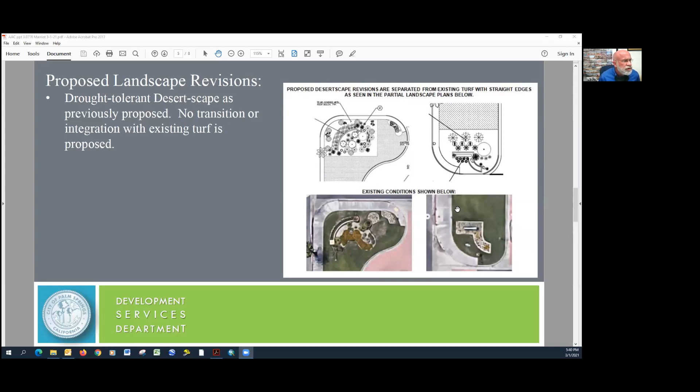On the landscape revisions, one thing the AAC noted was the abrupt edge created by the integration of drought-tolerant landscaping in a couple of areas on the site. These are just portions of the site for illustration purposes—these aerial photos show the turf they have now, and then the same areas with the proposed desert scape. The AAC's comments were that rather than having this hard line or border board, it should be better blended in a more naturalized way. That has not been integrated, and the plant scheme has not been changed, so we're still recommending those items be adjusted accordingly.

The lighting at the porte cochere is LED downlight in basically a square recessed fixture. On this drawing in the middle of the screen, you can see the lighting fixtures in two rows, and here you can see the photometric site plan showing the illumination levels produced by those lights. These are high relative to our typical outdoor lighting standards based on our outdoor lighting ordinance.

Often we see at gas stations and other commercial buildings with a public entrance that lighting levels are slightly higher than in the rest of the parking lot. However, these foot candle levels you're seeing here are quite high. So one of the things we're recommending is that they look at the output of those lights and perhaps go with something a little less bright in terms of the lumen output on those fixtures.

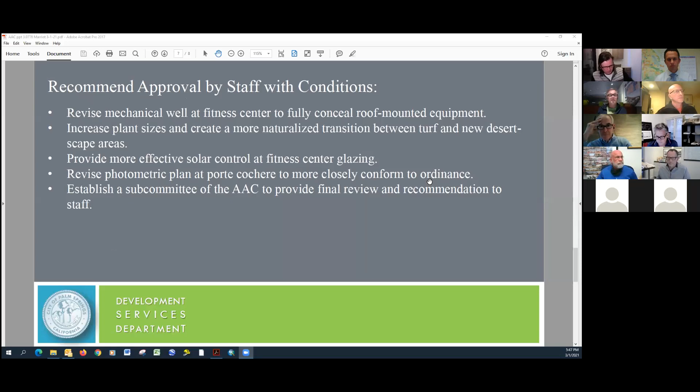As far as the fitness center, there's some discussion on matching the slopes with the existing slopes, which we did, and it created that parapet wall. There's been a lot of discussion about what that parapet wall should look like, whether it should be there. There are multiple opinions across the board there. Love to hear y'all's opinion, maybe a little bit on that.

So we have done that. It does shield it. We'll have to do one final study to make sure that the mechanical unit is completely shielded with the parapet wall, which it should be. We can reduce some structural trusses there a little bit.

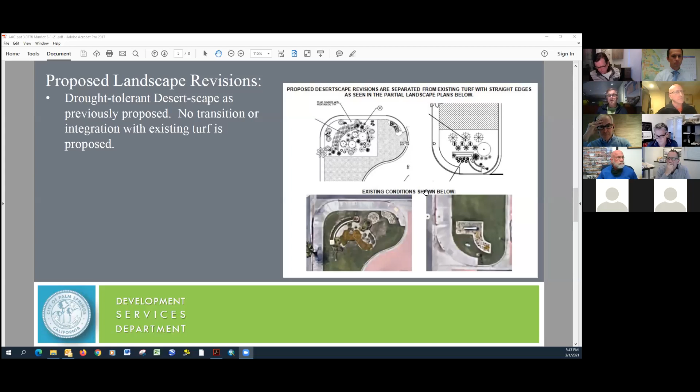We are open to changing the planting on the landscaping plan. That's not a problem, we didn't engage the landscaper to complete that. And then the portico lighting, I'm going to have to rerun the calculations on that. We typically see 30 foot candles in the center of these. It's a very high traffic area, it's the drop off, it's the pickup.

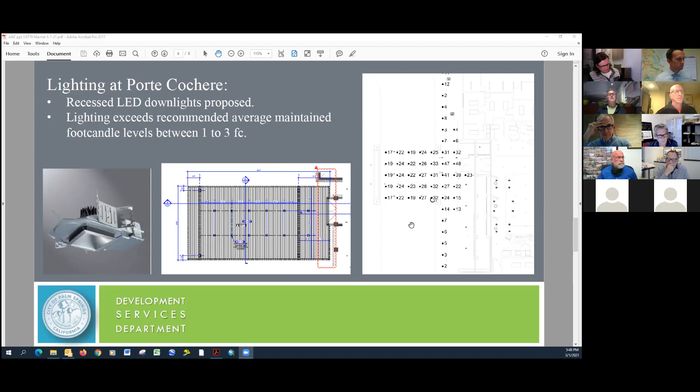I was just reading the final zoning, and I think they're only recommending 1 or 2 foot candles, which is way too low for this area. But we can definitely work that out between staff and make sure we get the right number that everybody's comfortable with. That's all I really have.

Okay, thank you very much. Is there any members of the public that wish to provide comment? If so, please give us your name, and you have 3 minutes.

David, I don't know if we have anybody in line or not. No requests to speak, Mr. Chair. So if there is anyone else on the video right now that would like to speak, you may unmute your microphone. Okay, I guess that will conclude public comment on the item.

We will move on to questions from the committee to the applicant. So do we have any questions for the applicant? I am not seeing everybody, so let me change my view.

I have one question. Is there any concern about using wood as the shading structure or the trellis structure in terms of maintenance and longevity?

There's really no concerns at this point. There needs to be a little bit more detailing to make sure we're holding it up. The concern was, and I think in the presentation we are showing it on all 3 sides, the east, west, and south side. Through our conversations with Ken, we didn't think the east and west sides would necessarily need it because you have 2 three-story buildings 15 feet away on each side. On the south side, if there was a concern, which there isn't, we could go to an aluminum system. We're just trying to keep costs down a little bit on that side, so we thought the wood would look a little better and kind of match the wood elements we're building in the front and on the side entrances too.

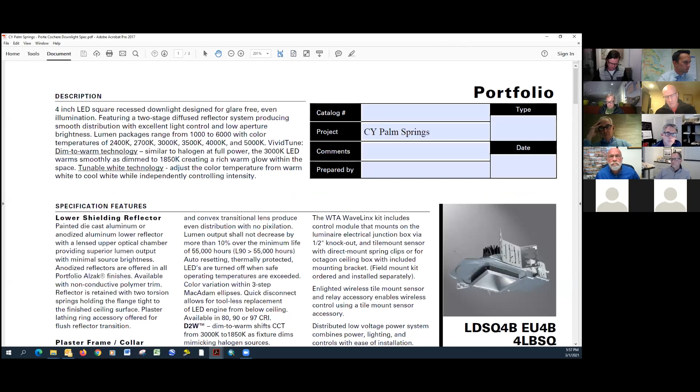Say that again? I think the architecture of the building is so much better when we don't have the parapet on top, that if we do have to sacrifice a little bit of differential in the roof slope, I think it's a small sacrifice for the overall look.

Mr. Vice Chair, this is something that if you'd like, we can work with the applicant at a staff level to resolve these kinds of minor details. Yeah, well, thank you for that, Ken. Let's finish with the committee questions to the applicant, and as part of our discussion we'll certainly consider that. Anybody else have questions for the applicant?

Member Lochner? No. Oh, you don't? No. Okay, how about Member Thompson? No questions. Thank you. Member Poline? Nope. Good. Okay, that leaves me.

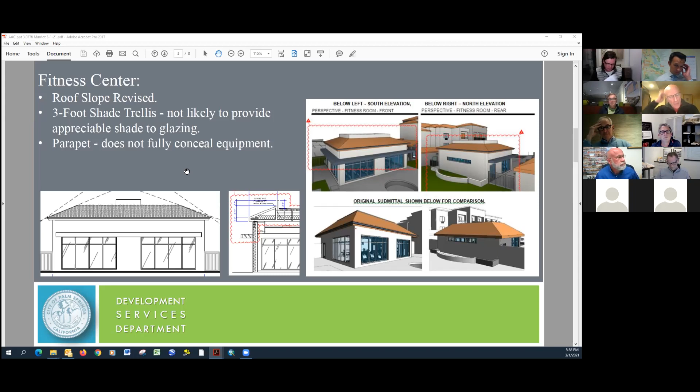So I'm going to go back toward the front elevation and talk about the portico and the proposed improvements, starting with the front entry doors and the new storefront you're putting in to the right of it. As I look at the elevation, are those new storefronts 9 foot tall? Correct. And what size are the entry doors, what's the height on those? The existing entry doors are 8 foot.

And so those existing doors are remaining, is that right? Correct, the sliding entry doors are remaining. And then on each side of the entry doors, on the return walls, it looks like there's also some storefront that I thought I read was going to be reused. Is that correct? On the right side, looking at the picture right now, that will be new storefront. On the left side, the existing storefront will be reused, correct.

Sorry, Robert, are you on sheet A201? Just a minute. Possibly. These are from notes that I had. Here we go. I was actually looking at the enlarged detail sheet, I think it was A323. And then also 324. Got it.

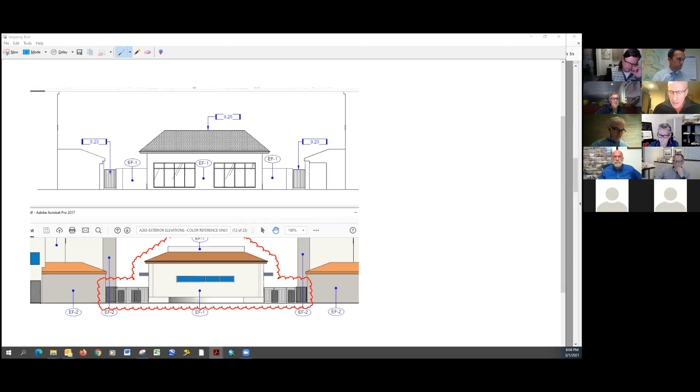And we come back, I guess, to the big issue, which is the proposed new portico. What's really being proposed is pretty inconsistent, in my opinion, with the architecture of the building. These were comments we talked about when you came before us in July. And I know you've made some effort to get it a little more consistent by reducing the height of that parapet and getting rid of the stack stone, but it still comes down to a basic design issue, that what's being proposed is so contrary to the rest of the building's architecture. I don't really know how you can resolve that.

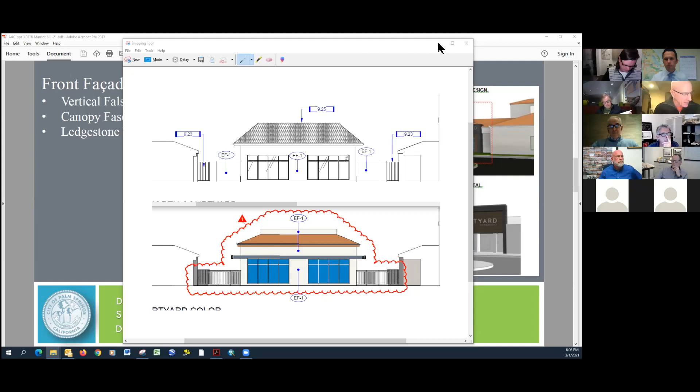It seems like a lot of money is being spent on this new porte-cochere, and I just don't think it ties in with the building.

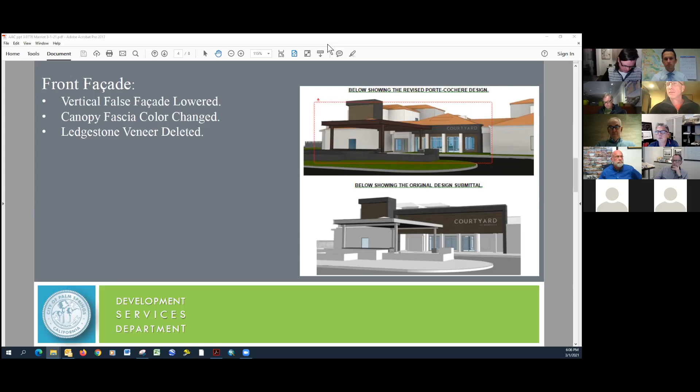So anyway, anybody else have some questions for the applicant? No, then that will, then we will go on to the committee discussion. So, anyone like to start?

How about Member Walsh? Sure. Chair Rotman, I think you covered a lot in that net you just cast out there. And I think there are some underlying foundational problems in the design approach that are not resolved.

I realize that pieces of this, like the fitness center, are sort of tucked back away within the site and maybe less important. But it's one of those times when I don't think the goals of what they're trying to do are working out through this design direction. There is a conflict of the underlying styles of architecture that is not smoothed over. It's as though they are designed either at wildly different points in time or by different people, and it doesn't come together as a harmonious elevational expression, number one.

Secondly, I kind of go back to there, you cross the Rubicon when that HVAC had to go up on the roof. And yes, I think the fitness center is strikingly disproportional. When you look at the elevation, instantly you can see it. The vertical distance between the window head and the roof eave is too tall. Changing the roof slope does help a bit, but honestly, this is not really pulled together.

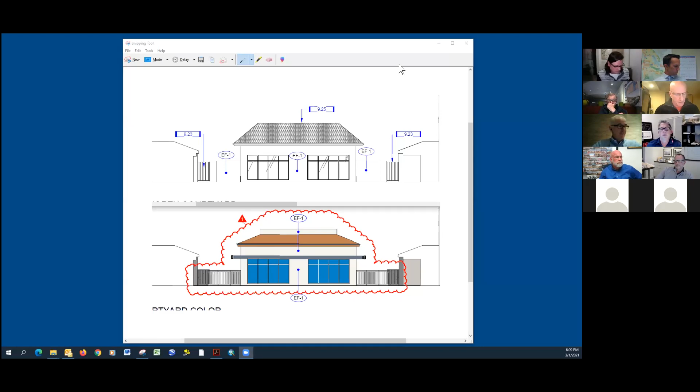In addition to some of the comments you guys made, as I read the staff comments and recommendations, particularly regarding the landscape, it's tough to elaborate on some of the landscape because you can't really see the landscape plans, unless I'm missing something. Is there somewhere I can go to see the landscape plans, Ken? Maybe I should have asked. Bear with me a minute, Member Locklear. Or a more detailed site plan? That's what I'm going to see. I'm looking in the current submittal.

I've scoured through. I don't believe I got a revised plan from them. So give me just a moment, I'm going back to the original submittal.

While you're doing that, I'll look at the fitness center on sheet A112, if I can take you all there, fellow members. It's a roof plan, but it's close to a site plan. Better yet, there's a better sheet, A111, the first floor plan. There's no equipment layout on this plan for the fitness center.

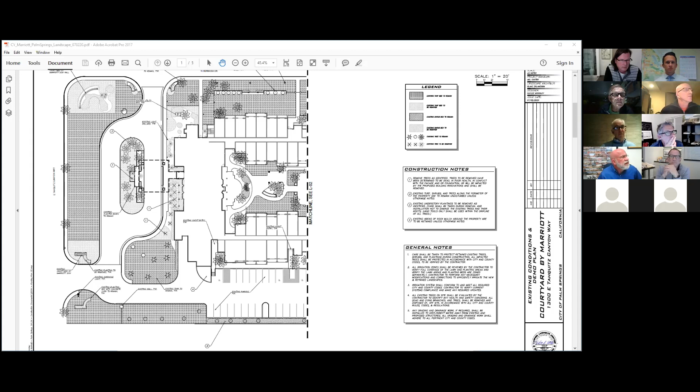I'm not seeing any materials here, no lighting, no ground cover... or maybe there is some ground cover. Well, in this particular exhibit, the material shown in this crosshatch pattern is the turf, as you can see here, here, and here. So this is all existing turf.

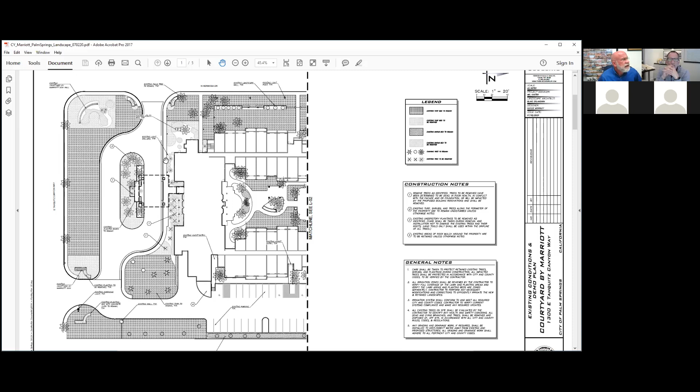The area proposed for new landscape material happens within this area here, this area here, by the frontage, and some work around here and here. In terms of plant material, there's a little bit of work happening here by the back end of the fitness center.

Here is their plant material schedule, if you will. So we're looking at a typical range of plants that we see on many of our commercial projects around here, with red yucca, blue yucca, Texas Ranger, and so on.

Okay, and now I'm starting to see sizes. The comment about sizes was coming from the AAC's comments from July.

Something back to the lighting you were talking about in the porte-cochere also. I noticed that no one touched on the Kelvin temperature of that, and I noticed it's called out as 4,000. I'm wondering if... I have spoken with the applicant on that, and they are willing to move that toward a warmer temperature around 3,000 degrees Kelvin. Okay, super.

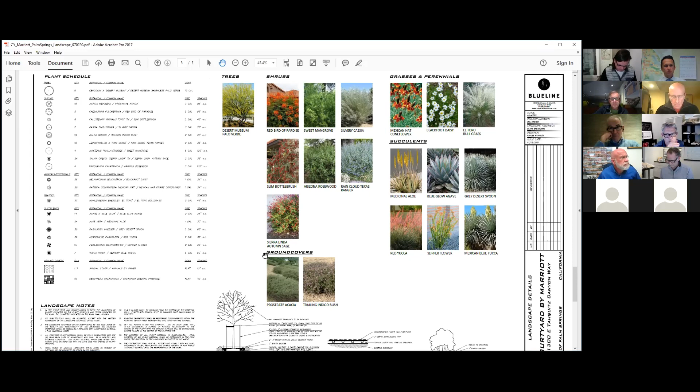Potentially, I'm not sure if that's going on elsewhere in what they're proposing in this fitness area or that front entry area — the areas of focus they're presenting here. I guess that's the summary of my comments. So in addition to what our fellows here have spoken about tonight, where the architecture seems out of line, the proposed areas of focus of their renovation seem out of line with the existing architecture. These other things seemed just kind of cold and depressing, unthoughtful when it came to landscape and hardscape also. That's all I have to say.

Member Pauline. I think everyone's captured my thoughts as well, so I don't really have anything further to add. Member Dosey.

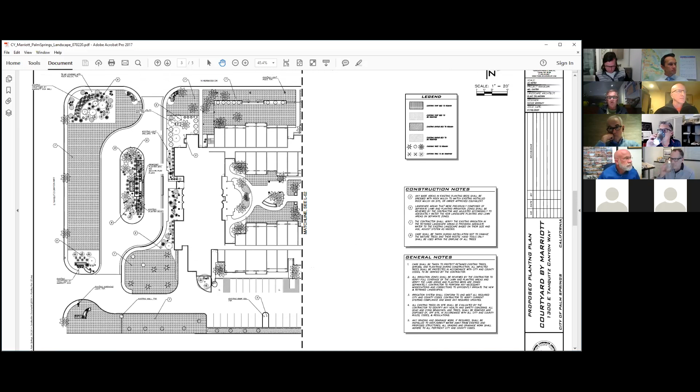So it appears where the fitness center's going, they're removing what might be an existing outside structure or palapa, and increasing the size — when you look at an aerial site plan, there's a structure out there right now, and then there's the spa. It seems like when I look at the aerial and then the site plan, either the fitness center is a much larger structure than what's there right now. To address Member Locklear's comments, I was wondering if it's possible that the fitness center be moved closer to the parking lot to create more space within the pool area, get some of those landscape features he talked about, soften the hardscape.

So I'm trying to make sure that the plans themselves are accurate, because I did not find a sheet that shows the existing structure in that area that's proposed to be removed. I don't think I had an image of that, Member Dosey.

I was going to see if I can bring up an aerial here on my other screen for you. We kind of see it outlined here on this landscape. Well, no, that's the new one. It just seems something's a little bit off. Are you able to see this aerial photo on my screen? Not yet — no, Ken, it's still showing your landscape. Right, okay.

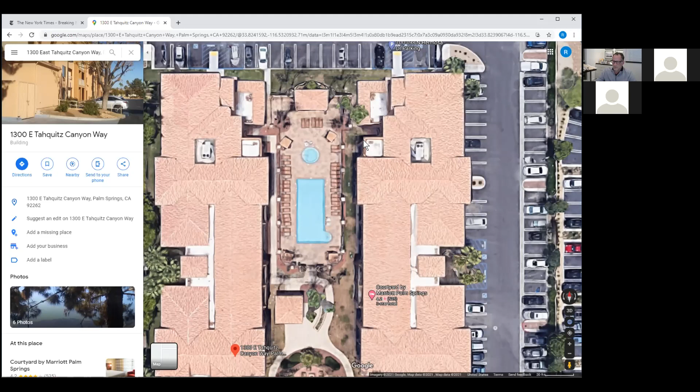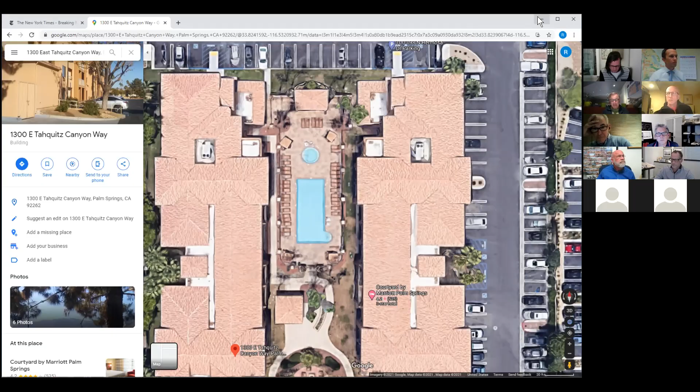Anything else, Member Dorsey? Well, not going back into the history, but I remember when this project first came through the AAC many years ago, there were a number of reiterations of the design of the building and the roof pitch. So what we see built had gone through a number of processes. I think to respect that is important to have complete cohesiveness of the project. I remember at that time too, it was about corporate branding and trying to rebrand the image of it. When you look at the proposed porte-cochere, I can see where somebody came up with a corporate branding idea, and now they're going to try to make it apply to a number of different projects. So it becomes more of a corporate identity, and I don't think it's really necessary.

Thank you. Member Thompson? I don't know that I have much to add, other than it seems like the modern elements they're trying to put onto the front - the porte-cochere and the squaring off of the building in front - doesn't have any consistency with the remaining architecture that's there. But I pretty much consent to what everyone else has said tonight.

Okay, thank you. Yeah, the only - I think I've stated a lot previously. In terms of addressing staff's recommendations, which I will find here, and the items we brought up last time, I think probably the best way forward is to create a subcommittee for this project. There still seems to be a number of issues that need to be addressed. I think the whole approach of the remodel and the rebranding of the building really needs to be looked at, and how it relates to the existing architecture. I don't think it's resolved. In my own personal opinion, I think they're spending a lot of money and it's not going to be architecturally beneficial to the building or their business. I think their money could be spent better elsewhere.

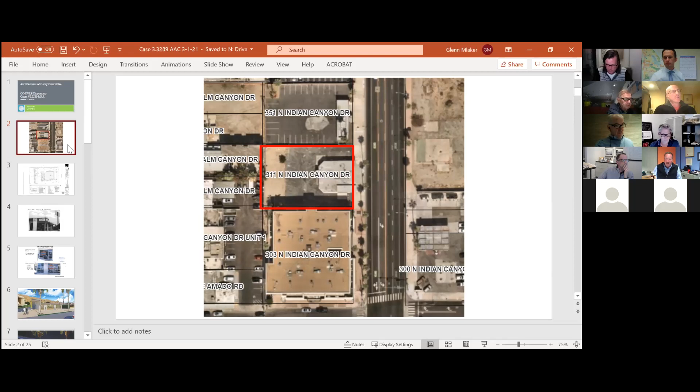You'll see that the site has the Palm Springs Life Building to the south, tribal land across Indian Canyon to the east, and to the north there's a building currently used as a smoke shop. The site plan submitted includes a clockwise circular motion for vehicle access, coming in on the south end of the building and circulating around to exit on the north. There are 9 parking spaces to the rear of the site and 1 handicap space placed close to the building, providing access.

This plan also includes the landscape plan, and one of our conditions of approval is that a more adequate landscape plan be submitted. This plan shows use of shade trees and some shrubs along the north wall to help soften that wall. As you can see, there's not much area for landscaping, but we have required them to put in shade trees for the parking lot shading.

As I mentioned, the building originally was the bus depot, the Greyhound station, and staff has found some historic photographs. This one was taken in 1968. I'll circle some items here: on the south elevation, the front door was here, and this went into Otto's coffee shop. On the front elevation, there are 3 windows along Indian Canyon. In a more recent photo from 2008, 40 years later, this shows the south elevation of, at that time, Cowboy Way Barbecue Restaurant, with the front door, a glass louvered window above it, and the front facade with the 3 windows.

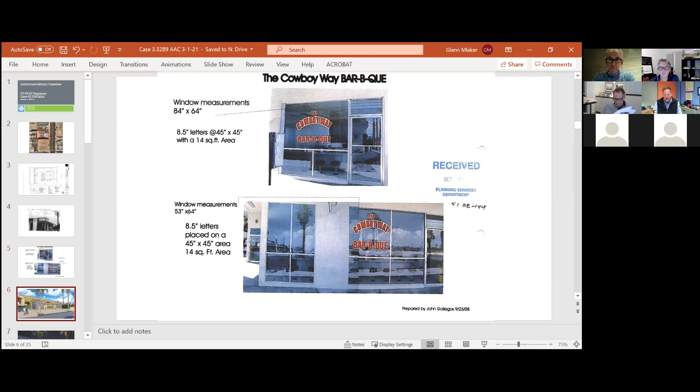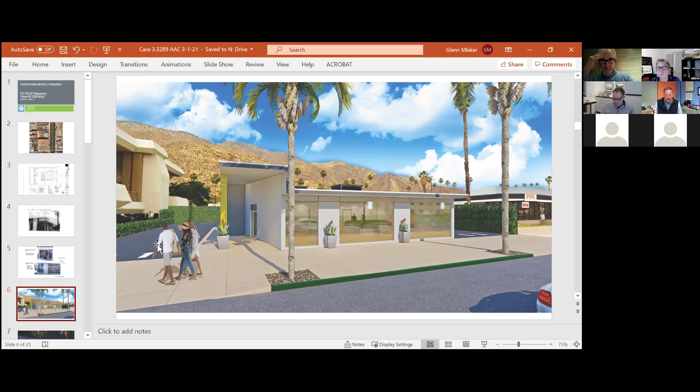Virtually the building has not been altered, at least the exterior, from the original design. In the proposal they're looking to renovate, they plan to use a seamless glass storefront system that will be able to see into the property. The vertical roof line will stay the same. One item that has been removed is the glass along the south building face; they've added a double slider door to gain access into the site. There was also a door that went into another unit space, not sure if that was original. Traffic circulates in on the south side between the building and the Palm Springs Life Building, then circulates back out next to the smoke shop.

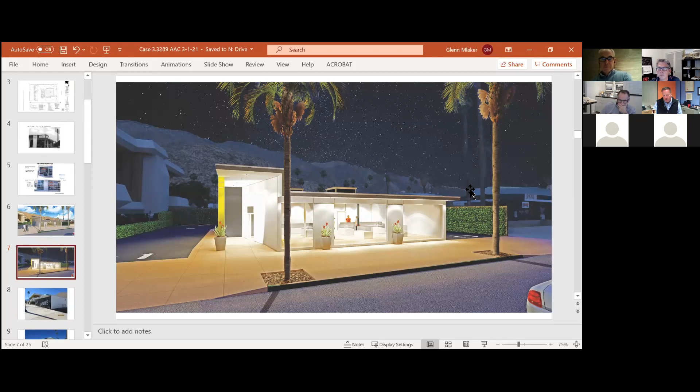They provided some other renderings of what it will look like at night. I want to point out that there are can lights up in the eaves of the building. One of the original 1968 pictures shows that these lights are there. They're also adding mechanical equipment onto the roof, and we'll show some mechanical screening in just a minute.

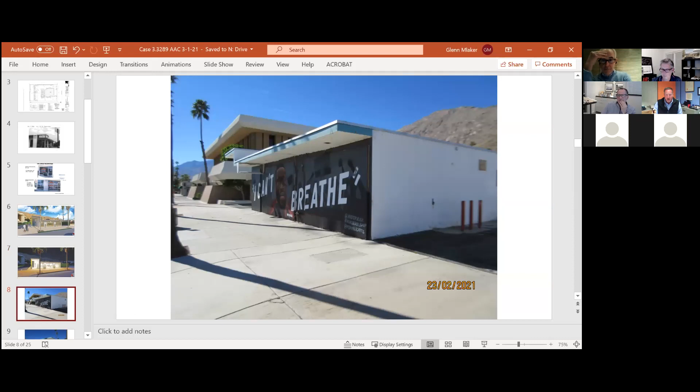Currently this is the state of the building. As you know, it's been vacant and needs a lot of improvement. We're glad that somebody's investing in renovating the building for this cannabis dispensary. Here are some other photographs of what it looks like now.

This is the window on the south side that they're looking to remove, and then the door towards the back. This is looking towards the rear of the building.

They will resurface and reslurry the parking lot, restripe it, and as we mentioned, add some shade trees looking towards Indian Canyon, and then the back. This will be paved, and the parking goes back to the wall.

The material board in your packet includes the frameless glass. The color is gray for the stucco, and the framing around the windows will be a dark black color. The mechanical equipment screen will also be that same color on the roof. I included some examples of the type of screening they're proposing to use.

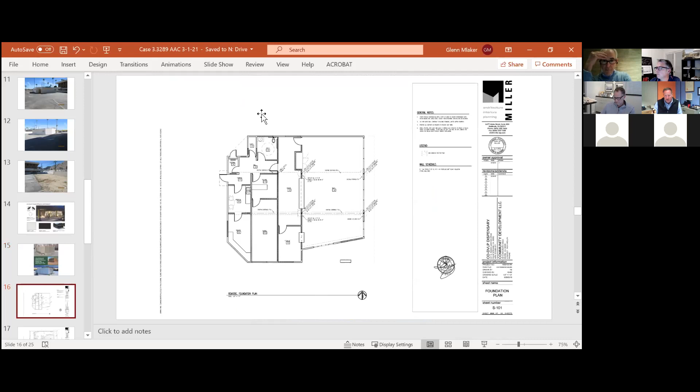In your packet there's also a floor plan showing the front door on the south side, and the windows along Indian Canyon. There's a delivery door in the rear, and this door goes to the mechanical unit inside. Once again, this is the site plan.

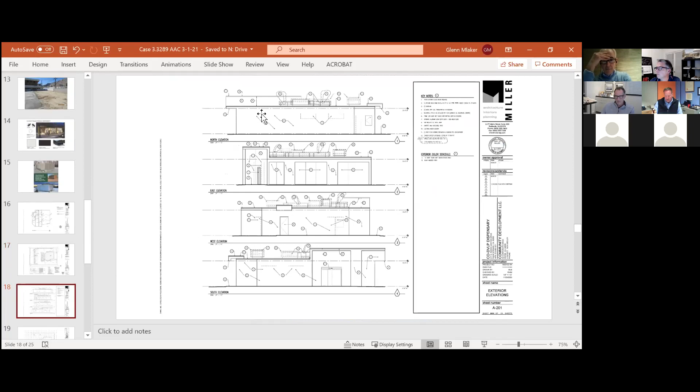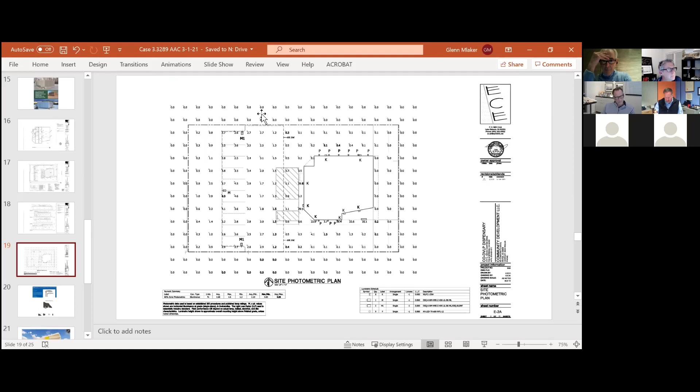You have the building elevation showing the details of the renovation, and then a photometric plan. The photometric plan included in your packet has been revised, and this is the correct version. You'll see they've reduced the overall lumens and foot candles to a significant level that will meet the zoning code.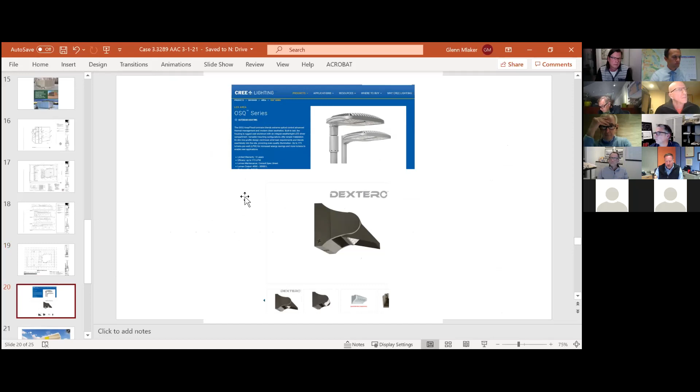The type of fixtures proposed are LED light fixtures for the poles, and then these little units that will go on the side of the building itself with a cutoff fixture that will focus the light down.

One other thing the AAC is here to review is signage. The cannabis ordinance requires this AAC to review signage. They're proposing to paint this column yellow, and the lettering is metal lettering that will be backlit, so lights will glow at night, spelling out 'Hyperwolf,' the name of the dispensary.

In this drawing it shows a planter bed in the front. That's not actually there—that's just a rendering. The renderer took that and ran with it, and that shouldn't be there.

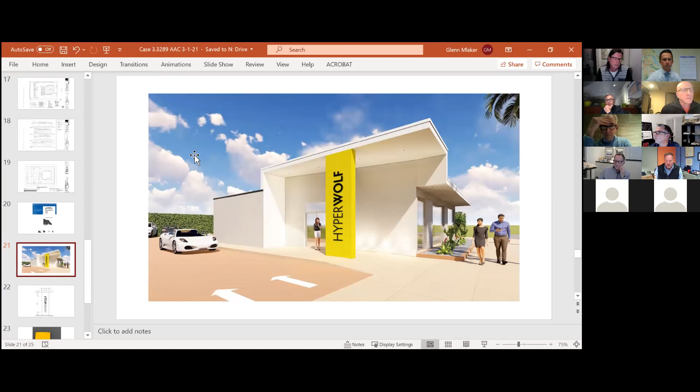So you have the details of the sign. The letters are 16 inches, which meets the design criteria for downtown. And then an example of the yellow that they're proposing.

Staff recommends that the glass on the south elevation be put back, and that a final landscape plan be reviewed at staff level. As I mentioned, they did come in with a revised photometric plan that meets the zoning code. Chair, that concludes my report, and I can answer any questions you may have.

Thank you. Does the committee have any questions for staff? I have one question, Member Thompson.

Hey Glenn, is staff recommending that window on the south side stay because of the historic nature of the Howard Lapham building? Right, it would be consistent with the 1959 design. We did ask the applicant to do that, and they'll give you a reason why they would not like to put it back in. Okay, thank you.

Glenn, did they give you in the lighting submittal any information on specs for the type of light and the color temperature? It lists lumens as negative one, which isn't really what we're looking for. However, they do meet the allowable max and min, which is what the code looks at as far as light intensity. So no, there's no Kelvin or any listing like that on these plans. Okay.

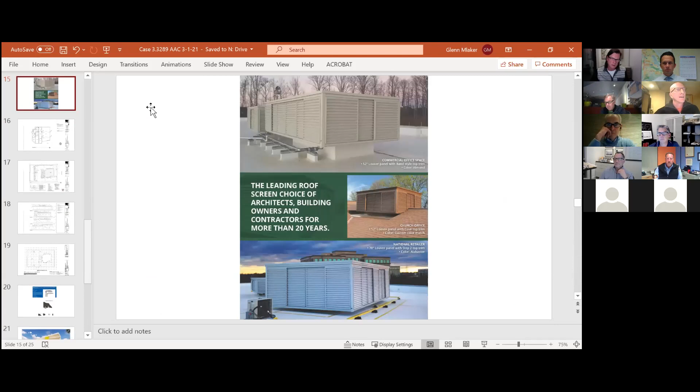Okay, so I've lost visual of the committee. Oh, okay, let me stop sharing. There you go. There we go. Thank you. Any other questions for staff?

I have one final question. Glenn, is there a reason why they can't do that planter in the front, on the sidewalk in front of those 3 storefront windows? So the property line goes right up to the front facade, so they would have to go through an easement process, and it's not always the way the engineering department wants to go. Okay, thank you.

Okay, any other questions? If not, we'll hear from the applicant. Please state your name and tell us about your project. 10 minutes to present, 2 minutes of rebuttal if desired after any public comment.

Good evening, members of the commission. This is Gary Miller with Miller Architectural Corporation. Also on the line is Nick Woolham, the owner, and Mike Bedell, our project architect. If I may respond to the question about the temperature of the lights, I don't have that available to me right now, but we're happy to provide whatever temperature rating that the commission sees fit.

If I may address the window situation, we had several reasons for shifting or reducing the amount of glass facing south and for placing the entrance further to the west on that south wall. One, the building having been built in the 50s, it does need some structural upgrades, and we wanted a portion of that wall to function as a shear wall. Two, as we have a lot of east-facing glass, we were concerned about heat gain and wanted to reduce some of the south-facing glass, even though some of it's under an overhang. The overhang's quite high.

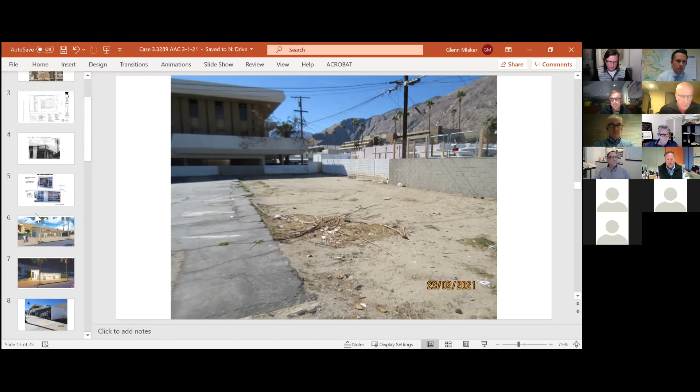And then in the back of the building, if you'll see on the site plan from the aerial view, there's a loading zone. We are intaking highly valuable type of content, so we have a secured area in the back. If you look, there's handicap and there's also a loading area. That's the space you're referring to, further on all the way to that back west wall.

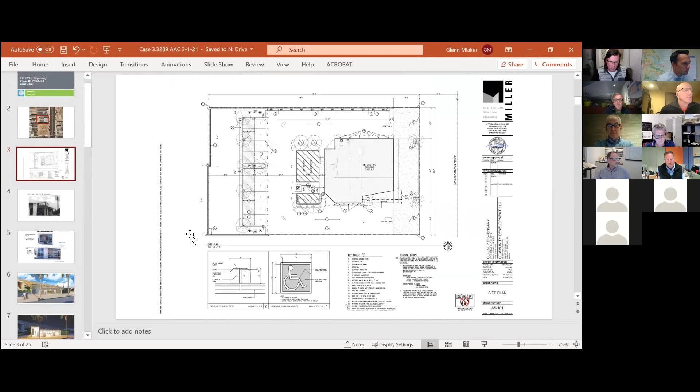Yes, that will be fully landscaped with agave-type style, modern desert landscaping, very minimalistic. Compact sand would probably be the base, and we would actually like to add some type of nature lighting for the evening as well. We like the tungsten warm type of lighting. We want to have the building very warm and welcoming. We do not want very bright LED style white light emitting from the property - we want very warm tungsten style lighting, shadowing the outlines of the property.

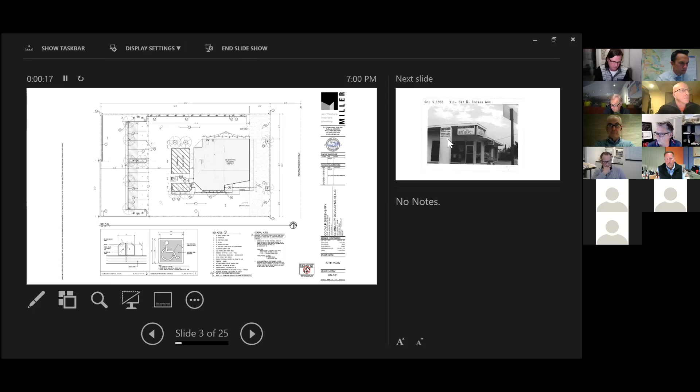Okay, thank you. Again, I don't have the committee, so if you have a question, please start. Anybody else with some questions for the applicant?

Yeah, I had a quick one. On two of the evening renders, I see one near the entrance - the first render doesn't have uplighting and the second render does. It has a little well below the wall by the front door. I was just curious, which is more accurate?

So I would refer to the color board - that is most accurate. That shows you the texture as well of the building, the concrete texture. The only thing that would not apply is that planter.

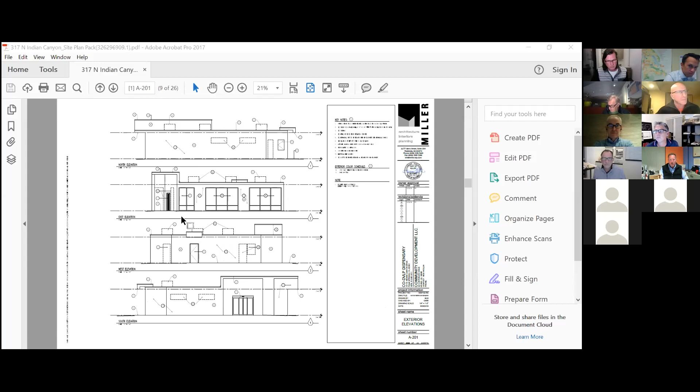Glenn, can you go to that color board?

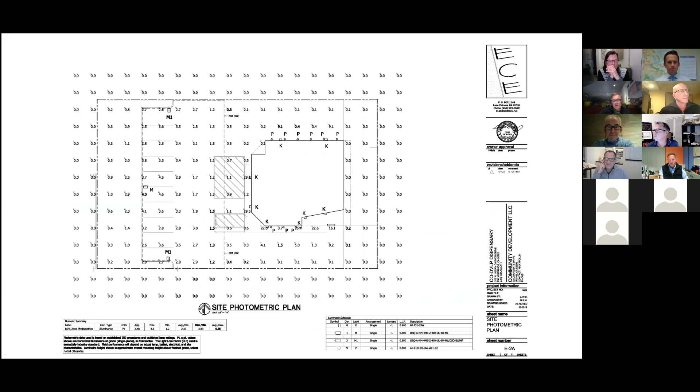That one, yeah. So this image I think reflects... there we go, I saw it. Wow, you're pulling through, there we go.

You can see the texture of the building, the color of the building, everything would apply except for the planter in the front, which is public domain. The uplighting on the south wall is intended, and that would apply in the landscaping as well. So how we did that uplighting, we would try to do similar effects via landscaping under agave style plants or palm trees to try to cast light up the tree.

Okay, anybody else? Got a question, Robert.

Member Doctor: how is the roof overhang allowed to violate the property line? Are you positive about the property line location? I've not checked personally, but I've been informed by staff that it's public domain. I've had the water department out there and the gas department out there too, and they've made a similar comment that the gas pipe is actually on public domain.

There are buildings in downtown that do have overhangs into the public right of way. That's not common that we do it now, but there are buildings that are in the public right of way.

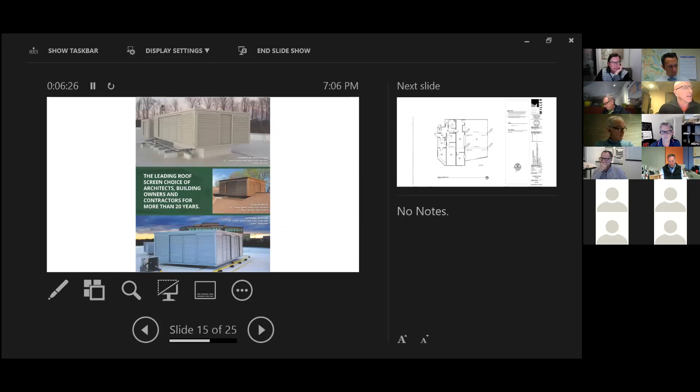So it's a biparting sliding door, and they slide over side lights, is that right? No, they're not side lights. No, that is correct, just as you described it, just as the floor plan shows. Okay, yeah, I mean that's how I'm reading it - sidelights, and then the moving panels slide over the side lights.

I think there might be a minor scale difference on the rendering as illustrated in the color board. But the idea is to have a single opening full of 8 feet, and then the sliding panels each are 3 feet.

And what is the height of those? What's the height of that door? It's 7 feet. We'd love to go 8, but the building has very low ceilings, so we're going to stay with 7. You're at 7, but the storefront along Indian Canyon is at 9 feet. Yes, correct. So is there something precluding you from raising it? There's a beam that runs across there for structural reasons. I actually have it at 7'6", the automatic door.

Okay, and the concrete wall treatment, that is along that whole south wall, is that right? Yes, that's correct. Okay.

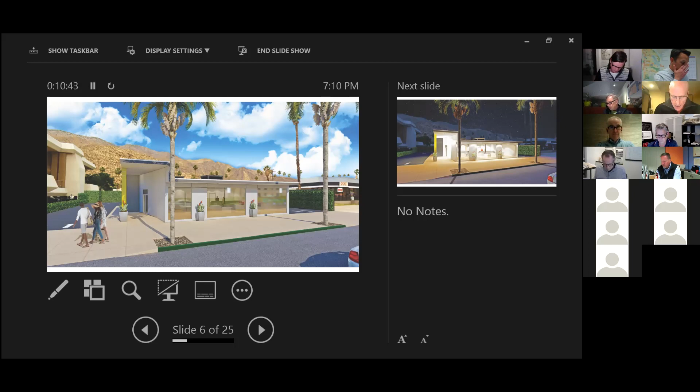If you look at A201, it might show it a little more to scale. Hold on, let me look at A201. Yeah, the south elevation. Given the height of that opening and the overhang, it just seems insignificant.

I'd like to point out one thing. It's a cannabis dispensary, so we do have some odor issues. The larger the access point we make, the more opportunity for air to escape. We've had so many constraints with this building because we're trying to keep the overall elements intact, and we've been challenged greatly to meet all these requirements yet preserve the aesthetics. So I want to highlight that for the design, the point was to not make a huge entrance, to not allow air inside and out, and also for air conditioning reasons - we're in the desert in the summer. The bigger the entrance, the more air is going to be coming in and out. That was the intent there.

It would be nice if you could do a higher entrance, but given the cost and structural issues, all I'm suggesting is maybe there's a way to make that entrance more predominant than it currently is, without compromising the odor issues or air conditioning. And if I may -

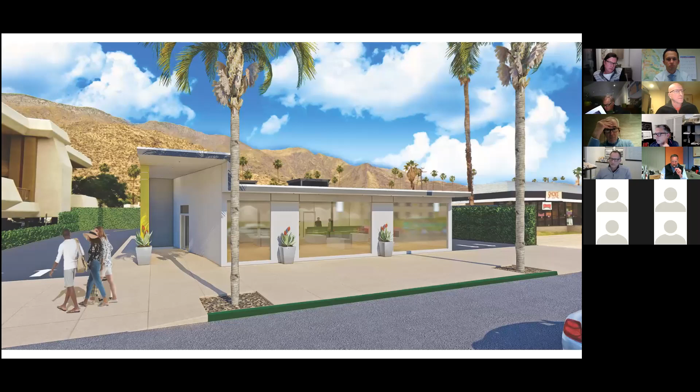Correct. I'd like to defer to Mr. Wollen on that. Yeah, as I stated earlier, our consultant brought this concern up that the entry was too close to the public sidewalk. We're also concerned about odor issues on the public sidewalk. We also have limited retail space in the showroom, and so that wall is giving us more retail space in the interior.

And so that would really do a few things that we're trying to avoid. If you're talking about wall space inside the room, you're just flipping the door from one side to the other, so you'd have the same wall space inside. I understand your argument about the odor, but as far as retail space inside, if you have an opening on one side and not the other, and you're just moving the door space, you're still going to have the same opportunity inside for wall space.

Well, if you see the floor plan, there's a check-in area that is to be separated from the sales area. The point is for security purposes, to have staff behind there, obviously for support and to check in and ID individuals. There's obviously age restrictions entering this building that we have to meet.

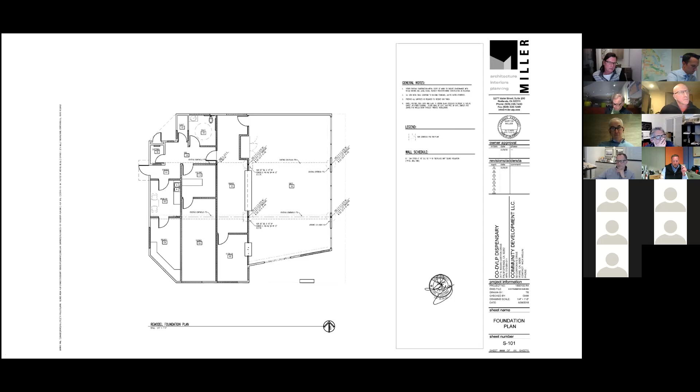So again, for the purpose of this building, I think it's a little bold to put the entry point next to a public sidewalk, in my opinion. A couple of cannabis places on Palm Canyon do have their entrances right on the street sidewalk. I'm just saying it's not unusual. Yeah, and their building and site plan vary significantly from mine.

Can I throw out just a topic of conversation? In the existing building on that south elevation where the door is, maybe you keep that 3-foot wide space and put that in as a window, a fixed window, so that when you see this building you have that sort of glazed corner look. And as you're coming from the south heading north, you can see more into your space, which would be a benefit to you.

And then maybe instead of an 8-foot wide door, you rethink that and go down to a 6-foot wide opening. Then you're still only losing maybe a foot of shear, and maybe you still need that foot of shear, then maybe you change your entrance a little bit. But I think Member Thompson's point and staff's point about trying to maintain the glazing at the corner is valid. A nice compromise would be to at least maintain 3 feet, or 30 inches, of it on the south elevation and adjust the entrance a little bit.

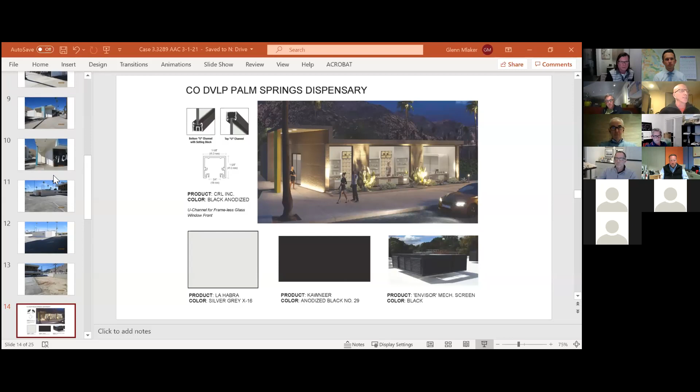Would you be open to that? I'm not sure I fully understand. Are you proposing to put a window, like a 3-foot window, on that edge? Yeah, if staff will, yes. Even if staff would pull up one of the original existing building photos, one that's not boarded up. There we go. So see where the door is on the south elevation in that corner?

I want to point out that that's not accurate, that window has changed since then. This picture's from 1963, the entrances have been modified since then. Is there an opening that is close to that corner? Yes. So what I'm suggesting is that maybe you maintain that space and then fill in the part to the left, and the space you maintain at the corner is glazed so you at least have a glass corner, a glazed corner.

If I understand correctly, I think that can be a compromise if it satisfies both council and staff.

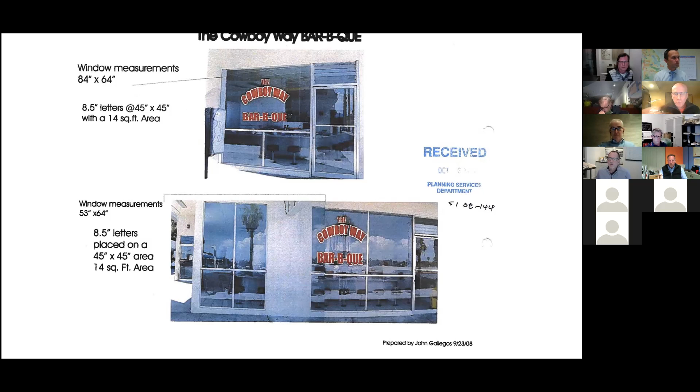You could think about a spandrel panel the whole length of that opening as well. You'd still have your display space inside, and it would give the impression of the window the full width of that from the outside. One of the things though, because we have so much glass on the front and we're in the desert in such a low profile building, I'm concerned about sunlight and heating elements. We're going to be kind of a fish jar already, so that was one of my concerns because the sunlight is very intense on the building.

Nick, if I can speak, when we refer to a spandrel panel, you'll actually have an insulated wall behind it. It's basically possibly a fake window. But if I may speak to the aesthetics, could you go back please to the color board rendering.

We and I think where we perhaps are struggling is the competing needs. One being how authentic do we stay with the existing building versus what can we do to create an aesthetic that we were trying to achieve.

In looking at that rendering, what we were trying to achieve on the south wall was this solid mass to give some degree of security. There is concern in the community that cannabis dispensaries need to be secure. But that's the kind of one of the images, and we feel we're secure because facing the street, there's lots of ability to see what's going on inside.

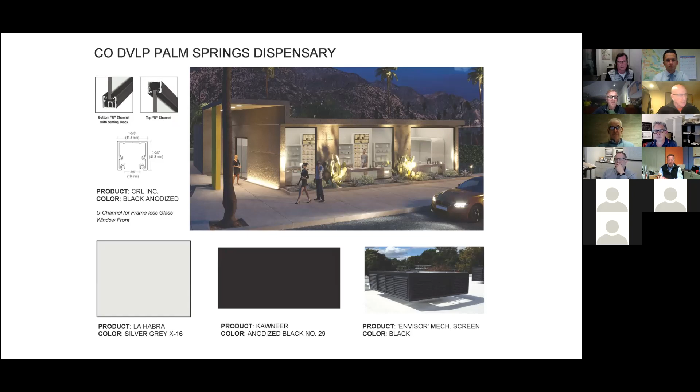Okay, thank you. Any other comments? I have one question.

Or maybe this is for staff. Are they required to have an area with a dumpster or for trash collection on site? Yes, they would need to have a trash enclosure. And my understanding is that these dispensaries do not have a lot of trash associated with it. But of course, if the use were to move, then something else would move in, and it's a requirement, so it would have to be on a plan, yes. Okay, thank you.

Okay. Any other questions for the applicant? Member Walsh? I have none, thank you. Okay. All right.

So then we go to the committee discussion. Member Thompson. You're picking on me first.

I don't necessarily buy the argument why the original window can't stay and that be the new door and leave the part in the back. I understand their aesthetic, what they're going for, but I disagree with that. I think it would look better if the height of that window was the same as the ones on the front. It looks kind of diminutive on the side where they've got it. It would be nice if they could get a variance to have a flower bed in the front there, or some kind of a planter in the front to help soften the building as well. But otherwise, overall, I like it. I like it quite a bit.

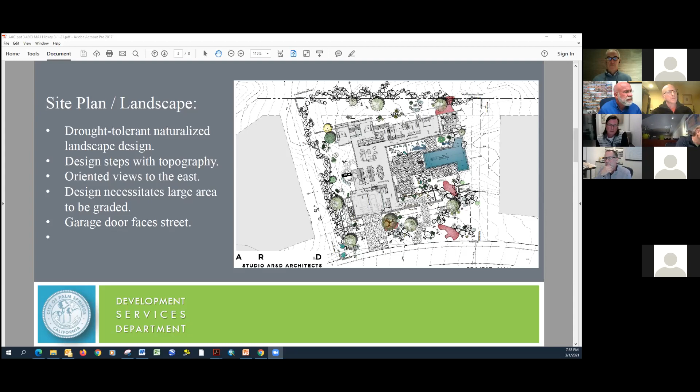And so it was reoriented as you see here. The one item I will note is the driveway is 16 feet wide. The Desert Palisades specific plan requires them to be only 14 feet wide. So we've noted that it doesn't conform in that regard, but it's fairly close—obviously the difference between 14 and 16 feet.

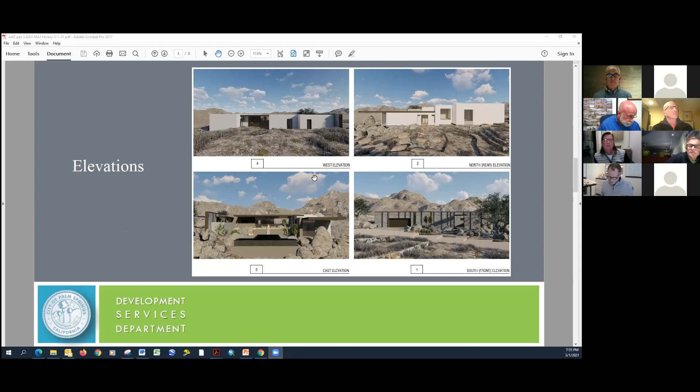Desert Palisades has a height limit of 18 feet, and the home for the most part does conform to that. There's a small area at that large cantilever at the master bedroom I spoke of that pops through the overall height limit very, very slightly.

Here's a little better view showing how the home lays out on the site. The site is generally a naturalized landscape plan. Because the site has a rather large footprint, including the terraces, there's going to be a lot of grading on this site, although mass grading is of course discouraged in Desert Palisades. But this home, by the nature of its overall layout, will require quite a bit of grading.

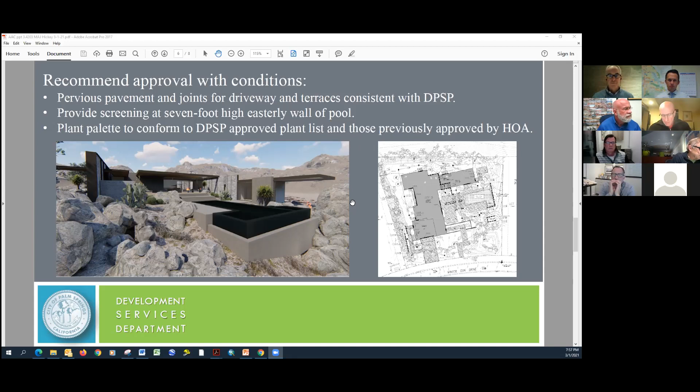So let me just go through a little bit in your staff report now, if I may.

As you'll see on page 2, you note where the lot is located within the overall Desert Palisades tract. It's one of those along Winter Sun Drive, which is the northernmost street in that subdivision. The images later in your staff report are those I've shared with you on the slide presentation. But the beginning of the analysis of the home against the various guidelines and tables of the Desert Palisades specific plan and the ESA SP zone begin on page 5.

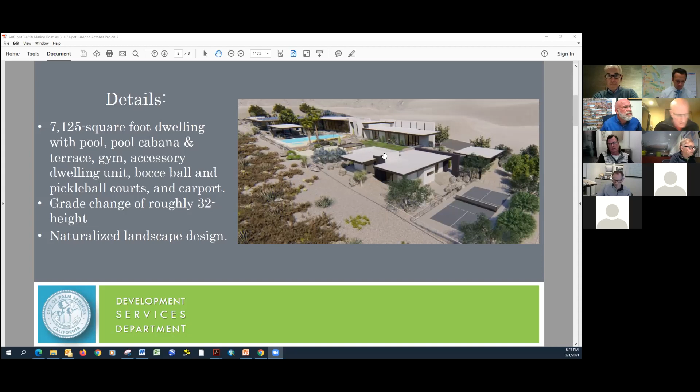Again, the architect and the landscape architect are proposing a naturalized landscape plan. Here is that pool cabana or small shade structure, the swimming pool, and then the home wrapping around to the north side. Here it is in plan.

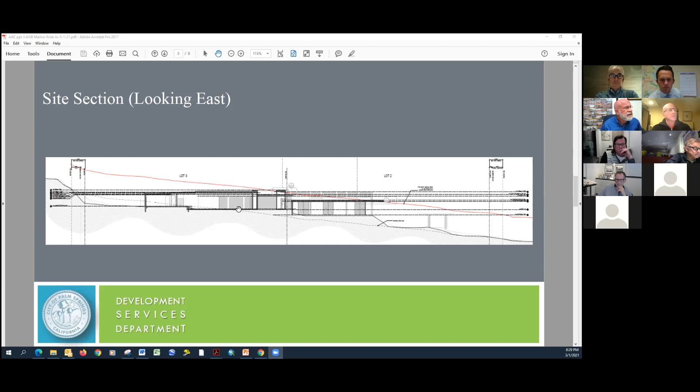This is a site section, which helps illustrate the significant amount of topography that this particular site has. I can't show you the relative placement of the swimming pool here, but it's further off to the right. You can see how the home is kept very low, very horizontal, stepping with the topography of the site. Over on the far north end of the site, there's quite a steep slope that goes up to the next adjacent existing home. A couple more perspectives help illustrate this.

And on axis to the pool, you'll see in your packet a number of delicious renderings that were part of this package that really clearly tell the story of what this design is all about.

The pickleball court is proposed to have nighttime lighting. In order to do nighttime lighting here in Palm Springs on a tennis or pickleball court, one is required to have a conditional use permit. So the project includes a major architectural conditional use permit for the night lighting, and an AMM because this one also has a bit of an over-height issue.

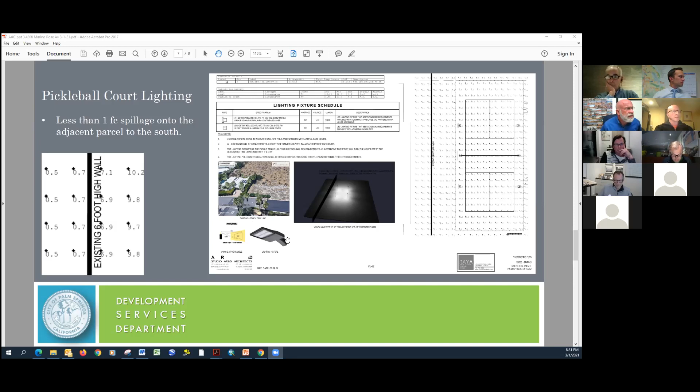That's important because the adjacent home is built right up to that side yard setback, so their enjoyment of the night sky and so on will be critical for these lights to be properly controlled.

These slabs will actually be poured in forms laid on the site, coated on the inside of that formwork with a white cement material that will then be on this undulating concrete wall. Just like typical tilt-up construction, these panels will be craned into place and then secured. They also have these small slots that bring a little bit of light and opening into the overall surface.

So that concludes my staff report. This one, I don't have any particular conditions that we're recommending on it. Of course, the house will have its typical conditions of approval that are put on any hillside home. That basically concludes my presentation.

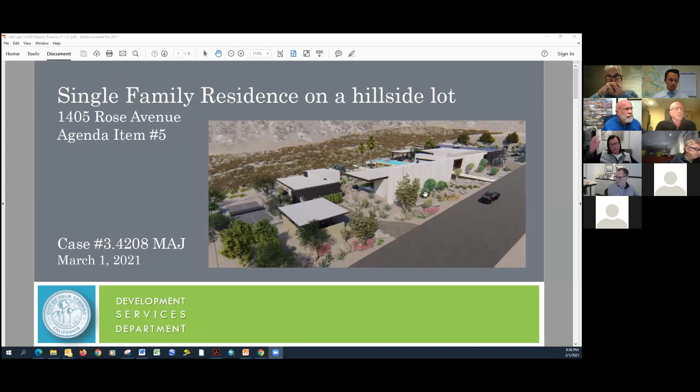Sure. The administrative minor modification, or AMM, is required on this one because the home has some slight overages in height. Let me share my screen again — I think it's best illustrated on some of these renderings. You'll note that as the building moves to the south... here you go. This really gives you a good sense of the grade change on this site.

So the top of the wall is kept at a standard uniform height, and as the site drops off, the wall increases in height. Down at this end it's about 16 to 18 feet from the adjacent grade. Looking at the standard development standards for the R1 zone, at the front yard setback the maximum height is 12, and that height can increase at a rate of 1 to 3 up to a maximum of 18. So the AMM is being requested to accommodate the design of this wall growing in height toward the south end of the building.

Okay, thank you. Anybody else have questions? If not, we'll hear from the applicant. Please give us your name and talk about the project. You have 10 minutes, plus 2 minutes of rebuttal after any public comment.

Hi, Nick LaFaro again from Studio ARD Architects. Ken, are you able to pull up that site plan again? Yeah, hold on just a moment. That one? Yep, that'll do. Again, thank you, Ken, for that great presentation, really breaking down the project.

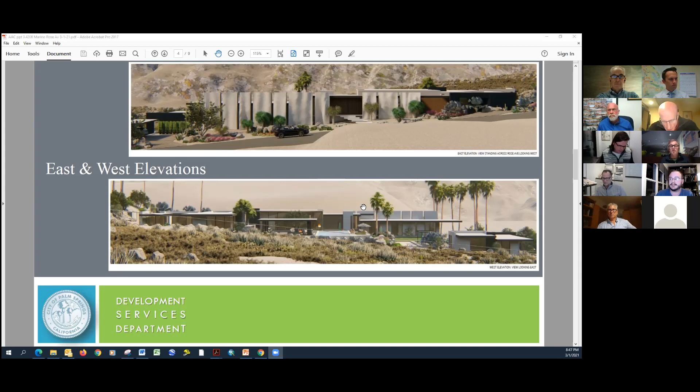But when you look at the site, these contours are fairly consistent east to west, so whatever it is at the grade there, it'll be close. If anything, the grade is higher at the curb, not the opposite - the grade is lower at the curb.

Can I get back to you on that, Tom? Sure. It looks like the curb or street contour might be around 627, and then our finished floor is... trying to see it here... finished floor there is 636.5.

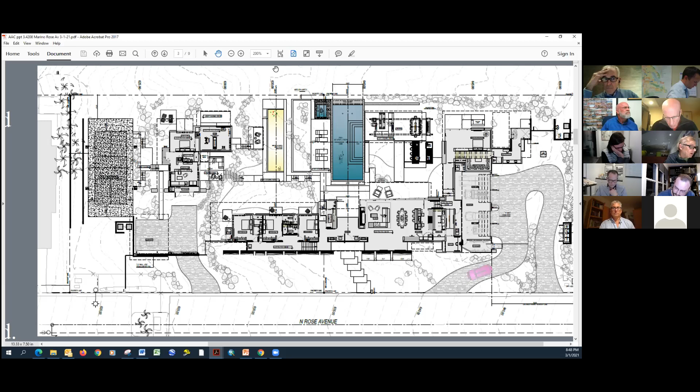So 627, 636. And so then the top of that column would be at 654? Yep, 654.5 - 654.8 is what I'm getting here.

Okay, 7 feet out there. So I just want to make sure I'm understanding it right - if we're at 627 at the curb, the top of the column is 654, is that correct? It's like 27 feet above the curb, to the top of that. Okay, thank you. You're welcome.

Anybody else have questions? Yeah, I'll ask. In response to the neighbors' concerns about the height of the wall, have you looked at any kind of site study in terms of how that wall would impact light and shadow across their property line or across their property?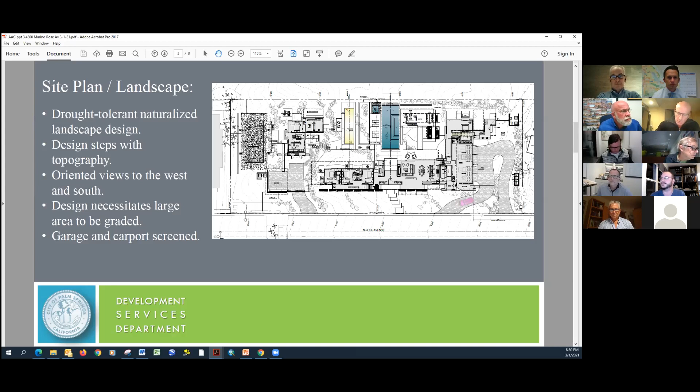We haven't yet. Ken, do you have that 16th site plan that I sent earlier, the one this particular image came from? I probably didn't make it to you yet - let me check my email. It helps show where these neighbors are and their distance from the house.

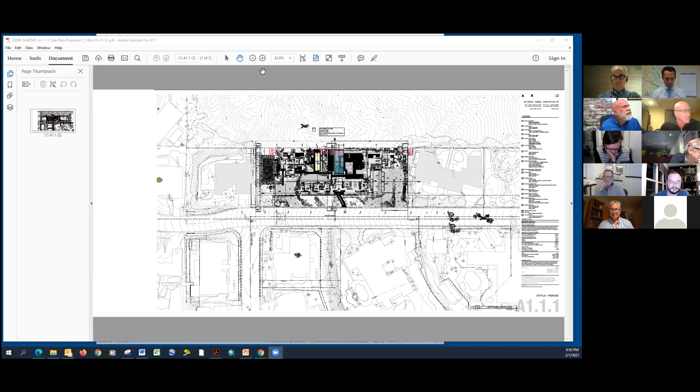Okay, this is the one that was the last one that came in. Is that showing up okay? Yeah, let's pan further down so we can all see where that neighboring house to the east is. That's a 2-story home too, elevated at a higher elevation than our finished floor that we're proposing.

We will prepare a lot more exhibits studying the sun and shadows for Planning Commission and the effect on these neighbors, which we believe to be fairly minimal. I can see that the concrete wall is pretty far to the east of their pool, so it shouldn't really impact from a shadow perspective. Okay, great, thank you.

Anybody else? John, anything? No. No, I have a couple questions then.

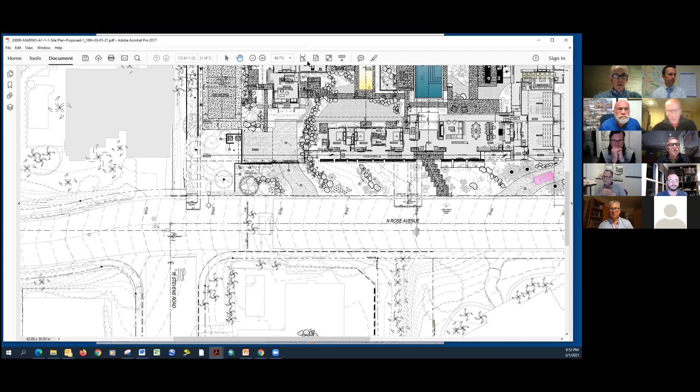Can you talk a little bit about adding some walls between the neighbor to the south and the pickleball court? Can you talk about what's being proposed? What was sent in my package doesn't show any walls at all, so maybe you can tell me how high they are, what the material is, and how it impacts the landscape plan that was originally submitted.

That's right. So what you see on the original submittal is an existing wall along the property line to the south - I believe it's about 5 feet high with a metal portion of open fence on top. What we're proposing is, we've got an 8-foot public utility easement there where we'd like to be planting olive trees and multiple thick foliage trees, building another masonry wall that would be 4 foot, 4'6" higher than our pickleball court.

We're proposing for all of our CMU to be a super slump stone with a thick, heavy mortar finish. So that'd be 4'6" higher than our pickleball court. We're proposing a 3-foot barrier between that masonry wall and where the concrete portion of the pickleball court would begin, again getting medium sized plants and foliage in there.

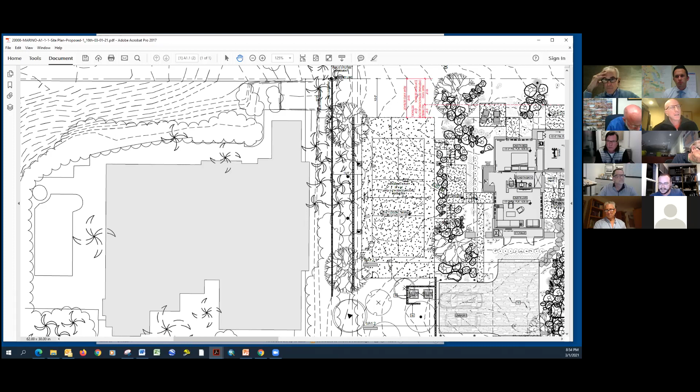It's at 619.5, which we determined - if you pan down, Ken, you can see where that 620 is, almost dead east of where we are. Our pickleball court is at 619.5, so we're trying to keep this thing low. And do you have an idea what elevation the house next door is?

I'm sure I can find it. We have a survey, I think I would need to consult with them. Okay, yep.

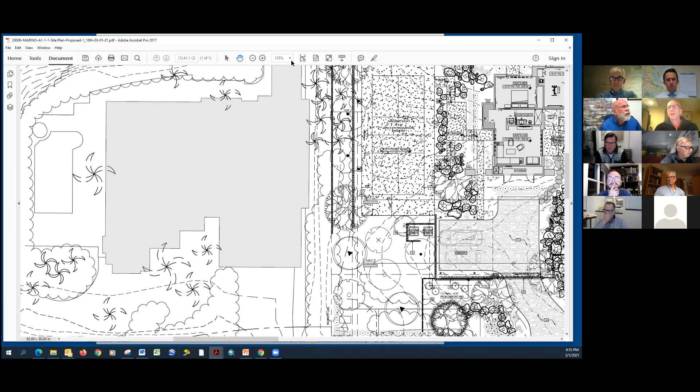Out of curiosity, did you look at internalizing the pickleball court to the middle of the site, where the bocce ball court is, away from the neighbor? We located it based on views for our casita and living spaces, and we knew we wanted the bocce ball court to be the center of activity. There was no question in our mind that bocce was going to be central. Bocce and pool, that's how they live their lives and play. The pickleball players are just social players, not playing every single minute of every day. So that's why we located it where we show it.

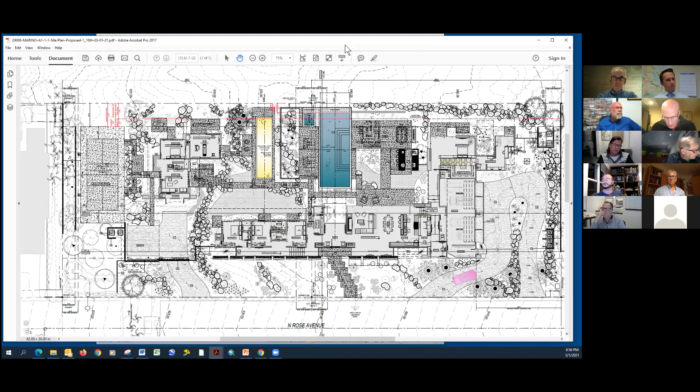On the finish materials board, item number 10 lists stucco colors with options A, B, C, D. What are these actual colors, or are these just possibilities used somewhere? I'd like to have that rejected from the material board. Can we just rip that off? We have decided not to do any of those colors. The heavy texture stucco we're proposing is 6A, which is a dark gray. Okay, all right.

I think that's everything I've got. Thank you. One additional question, member. About the lighting on the pickleball court, if they're such casual players, why does it need to be lit?

The reason is they'll be playing during wintertime. They're so close to the mountains that the sun goes down really early. We've added to our notes that we have a timer so you can only play max an hour on it, at most 2 hours max into dusk. But we do have David Marino here, who might be able to explain that further if you'd like to hear from him. No, I was just curious if they're such casual players why they'd want lights on it, but your reasoning makes sense. I understand it.

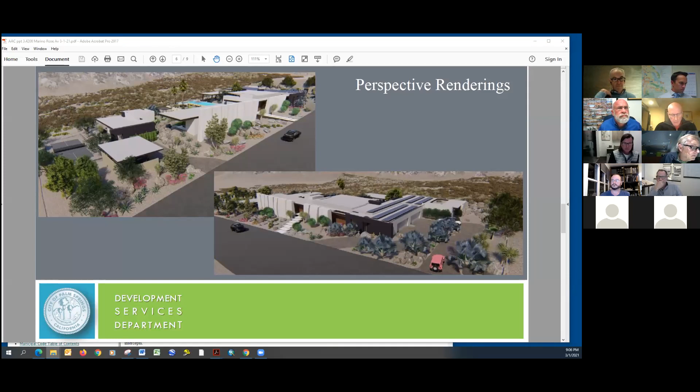I don't know, Ken, if you could get to that page or not. I'm trying to see if I can find it as you're talking, so give me just a minute. But keep going, and I'll get this up on the screen as quickly as I can. That's the most obvious one. Let me try something here a moment, bear with me just a second. Give me just a second, now I'm going to get to these back drawings.

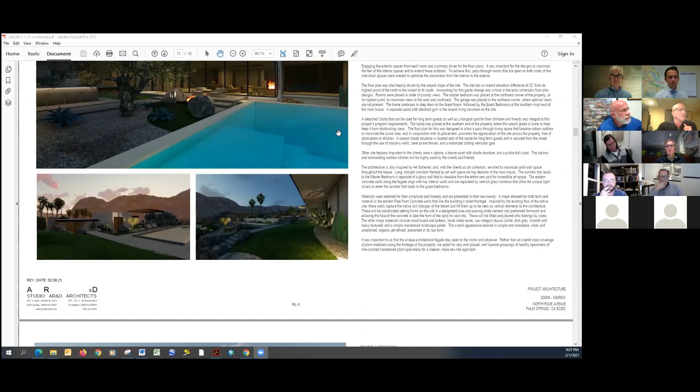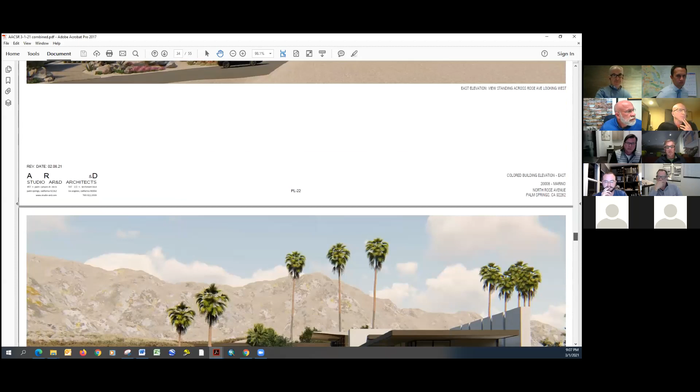As I go through this packet, please stop me on the image you're asking about. Yeah, keep going, I think it's on page 24. Yeah, 23 or 24, you can kind of see it pretty obviously. Let me get this mouse over here a second. Okay, here's this, this is 23, the first one, is that the one? Yeah.

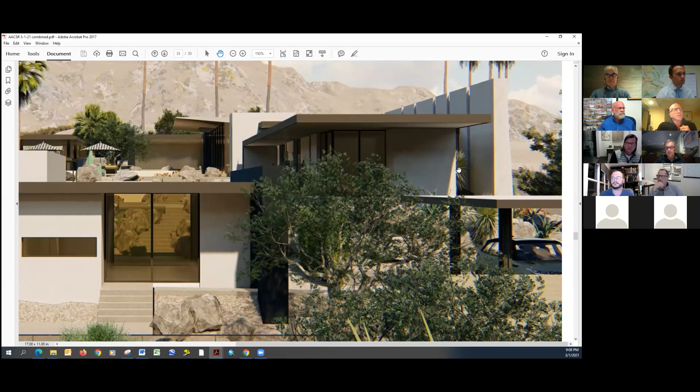So you can kind of see where the roof plane kind of intersects with that wall. It just feels odd to me there. I'm not sure if there's a better way to make that connection, but it just kind of feels bizarre. Now go to the next image, and it even becomes clearer, where from that side, it really looks like those are kind of disconnected panels over there. So it just feels a little bit awkward to me, that's all.

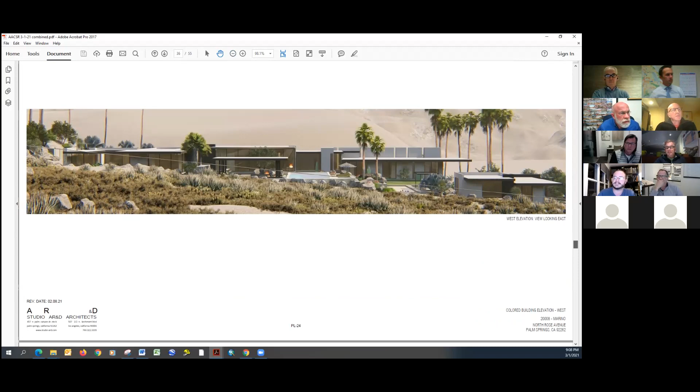If I'm not mistaken, Nick, on this particular area, isn't the roof plane slightly separate from the wall? It is separated, so that southernmost concrete form is freestanding and it does not connect.

I think I can, here, you can see it here. So here is that southern part of the home. Here's the wall, and this is actually an open area that's got some landscaping in it.

I think the imagery or illusion when you're looking at it from this part of the lot is that the wall is almost separate from the volume of the house. But it was important for maintaining that view corridor as you're walking down to the guest rooms without needing to create unnecessary conditioned space within. Right, and keep the rhythm of these walls too. Right.

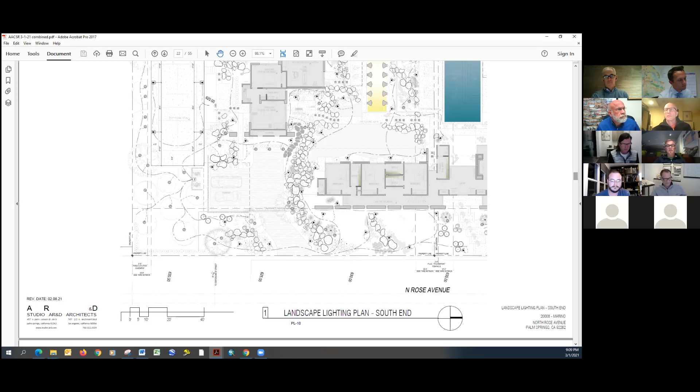That's my only comment. Who have I missed? Me?

Yeah, so I think for me, the critical issues are the height of the wall at the southern end and the impact. 27 feet above the curb is really a big element. It's a huge element. And I know the neighbors across the street were talking about views.

And what's commonly done in Los Angeles, and maybe here to a lesser degree, is that you stake out where the building is and the heights so that you can actually see what impact that building will have on the residents, the neighbors' view corridors.

And I think that's really going to be important for this, because quite frankly, at 27 feet above the curb, and I'm assuming they're at a comparable elevation as the street at their pool deck, that's going to block their view. And as I look at it, what opening there is, maybe above the carport and the driveway gate. But then you've got a building beyond that.

So I'm really concerned about the height of that. And I understand architecturally, I think it's a beautiful idea. It's beautifully executed. I just don't know that it's as neighbor friendly as it ought to be.